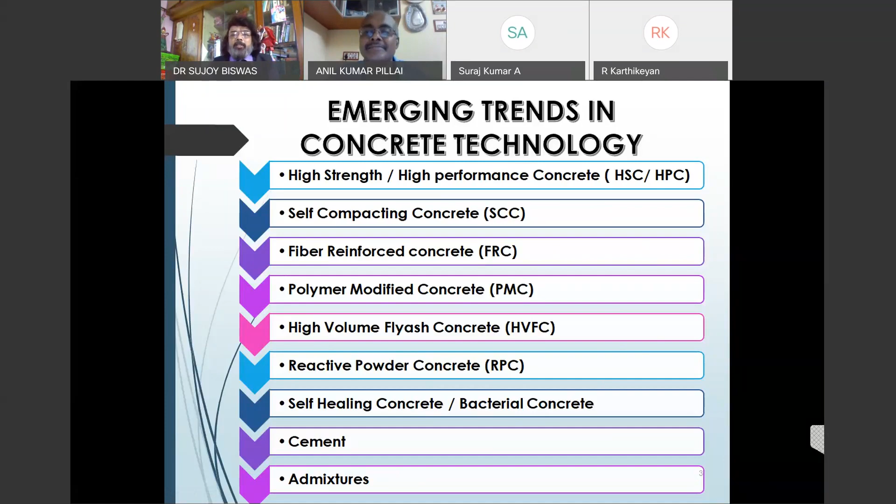Then I go to the next slide, which is the high strength and high performance concrete. The high strength concrete is primarily used in critical components. For structures exposed to aggressive environmental conditions, high performance concrete ensures long-term durability in terms of resistance to weathering action, chemical attack, abrasion, etc. High fluidity without segregation, low coefficient of permeability, and high dimensional stability are some of the characteristics of high strength or high performance concrete.

I've also given a snap of a cutting section of a real size RC column using 150 MPa concrete. Steel fiber was added in this 150 MPa concrete to prevent early spalling of the concrete cover. I wanted people to exactly understand the slide, so at the end of the slides I have given a technical glossary of the terms I've used - what is low coefficient of permeability and stuff like that. That will come as we go to the end of the slide presentation, and I'll end by describing that stuff.

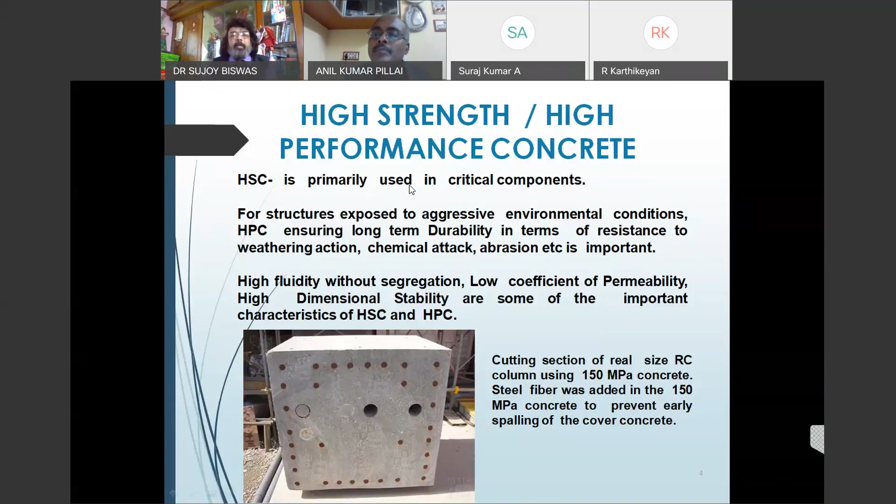Then we go to the next variety of concrete - this was the first. The second one is self-compacting concrete. The use of self-compacting concrete is basically in the precast industry, and it is gaining increasing attention due to many benefits that can be gained from its properties.

We need to remember that the concrete is capable of self-compacting, occupying all the space in the form without any external means, like mechanical vibration. So it's self-compacting concrete - it means we haven't got to put the vibrator on. This vibrator is very important because vibration actually helps the concrete. We have seen during roof casting and any kind of work that vibration is needed.

Now, what goes wrong - I had the experience on site while the G-blast furnace concreting was going on in TISCO in Jamshedpur. You know, the G-blast furnace has a huge depth, and because of that depth, this concreting cannot be done at once. It has to be done layer upon layer, layer upon layer. So what we needed to do first was use mechanical vibrators - yes, I'd not be speaking the truth if I said it wasn't there, so it was there.

At the same time, concrete chemicals were there - you know, the concrete chemicals which delay the time of concrete getting stiff. So delayers were there, and then self-compacting concrete was used, so that the vibrators don't make a difference between the first and the second layer.

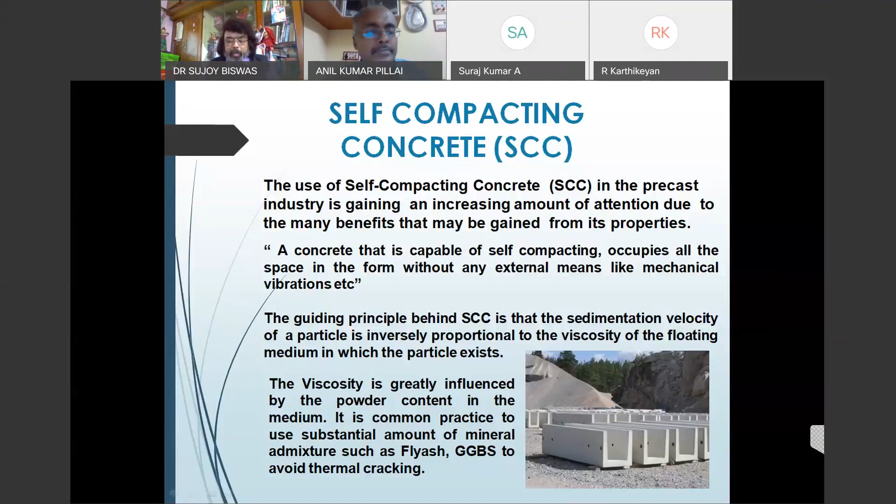So this next slide is about fiber reinforced concrete. Fiber reinforced concrete has the flexural deformation ability of a ductile cementitious composite.

So what is fiber reinforced concrete? Fiber reinforced concrete is a type of concrete that includes fibrous substances that increase structural strength, durability, and ductility. These are the three things fiber reinforced concrete provides: increased structural strength as the main benefit, durability, and ductility.

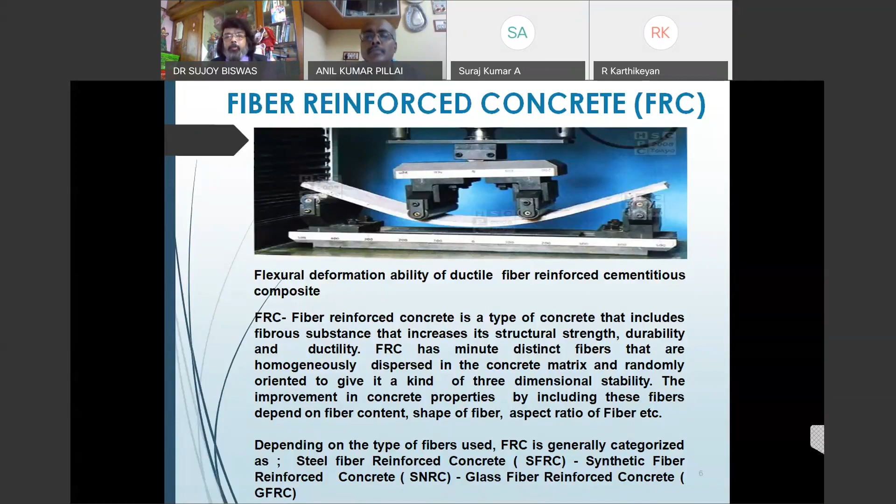So we move to the next one, polymer modified concrete. On the left, I've given a picture of an unmodified patch, which is easily dislodged due to lack of hydration. On the right, a modified patch at 10% polymer by weight to cement would not budge.

In certain cases, we use concrete formulations using organic polymers or resins to tackle the limitations offered by ordinary concrete. This polymer concrete involves mixing in polymers or resins, and it tackles the limitations posed by ordinary concrete, which can be overcome by the addition of polymer.

Polymer concrete is a composite in which 10 to 15% by weight of cement binder is replaced by polymer. If we can remember one thing after this presentation, it's that in polymer concrete, the by-weight composition of the polymer is 10 to 15%, and the binder is replaced by a synthetic organic binder or polymer latex. That is polymer modified concrete.

The takeaway from this slide should be that hydration is very important - as shown in the first portion, regarding what can happen due to lack of hydration. We keep saying cure concrete, cure concrete, cure concrete, just as we need to cure the human body. As water is very good for the human body, it is also good for concrete - curing is very important. For polymer concrete, the takeaway is that 10 to 15% by weight of cement binder should be present.

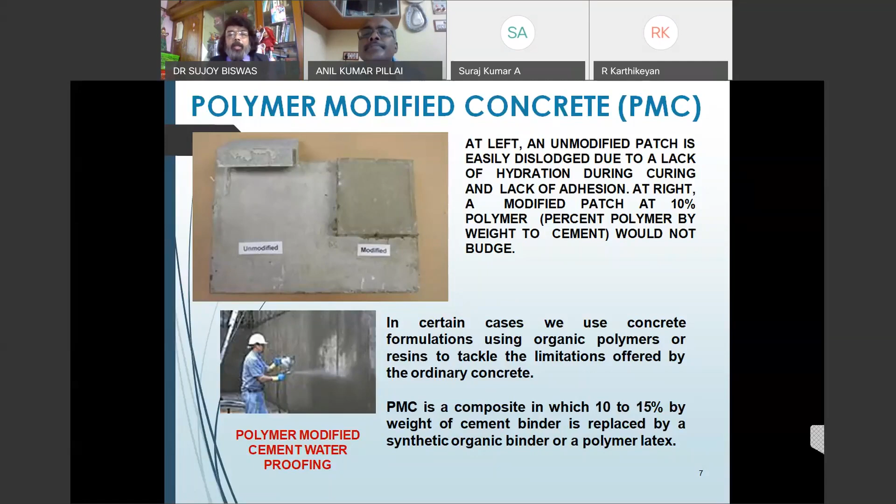The next topic is high volume fly ash concrete, or HVFA. This has huge utility - fly ash concrete is used in severe exposure applications such as decks and piers of bridges. Most bridges and piers running for kilometers use this high volume fly ash concrete. I've given a picture of Tampa Bay's Sunshine Skyway Bridge, which is very scenic to look at.

When we think of civil engineers, we only think of the computer engineers who design software packages in those countries. It needs to be remembered, if civil engineers do not lay the foundation or the infrastructure, nothing is going to stand. If cement people don't produce cement, tomorrow we are going to be nowhere, whether the economy is strong or weak.

So I keep on saying, continue with high volume fly ash concrete, which has very low water content. At least 50% of the Portland cement mass is replaced by class C or class F fly ash. High volume fly ash concrete has 50% fly ash. Sometimes, due to low water cement ratio, use of super plasticizers are required to improve workability while placing the concrete.

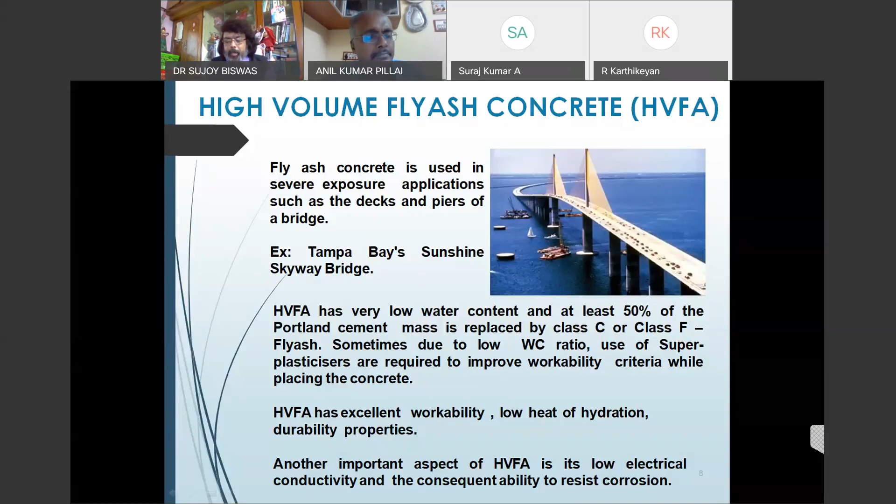Then if we go to the next slide, we'll show the reactive powder concrete, or RPC. The reactive powder concrete is an ultra high strength and high ductility composite material. It is a special concrete with its microstructure optimized by precise gradation of all particles in the mix to yield maximum density. I've given the picture which shows reactive powder concrete.

We find from the picture, on the left hand is the reactive powder concrete, and the right hand is the steel beams. We find it's very difficult to distinguish, even for a civil engineer, by seeing a black and white picture, what is steel and what is concrete.

The cement in the concrete portion is strong in compression and weak in tension. The steel part is strong in tension and weak in compression, that's why reinforcements are done. So here the concrete itself, not only its compressive strength, but its tensile strength also increases. This is one of the takeaways from reactive powder concrete.

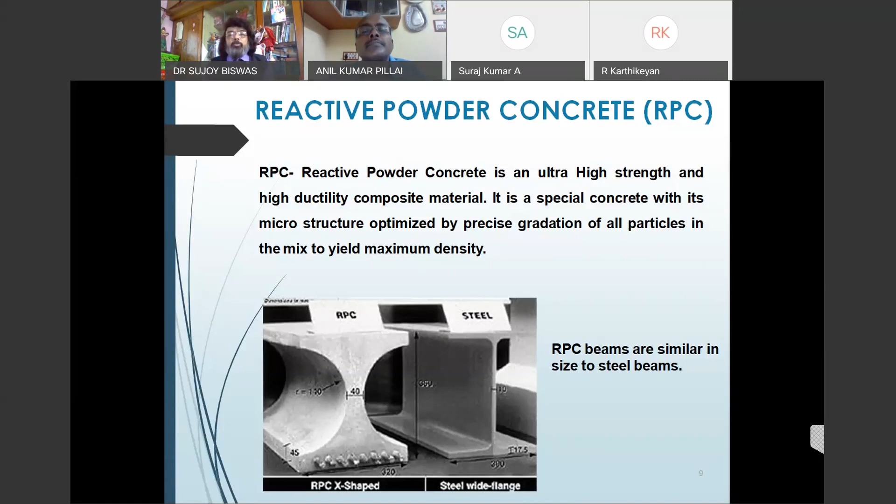Then we go to nano cement. Nano cements are being developed as cements containing well dispersed nanoparticles of cement and mineral admixtures. These nanoparticles would be evenly distributed. Again, the even distribution in any sort of concrete is very important. Evenly distributed among the larger particles of mineral admixtures, and with such fine dispersion, even the lower content of cement should be able to provide us the desired binding of aggregates and admixture particles. These are the nano cement qualities we need to discuss.

First of all, there should be even distribution, among the larger particle mineral admixtures. There should be concrete admixtures used, and the cement should be able to provide the desired binding of aggregates and admixture. This has to be very neatly monitored by the engineers working on site, who must be very serious, because we know what can happen if certain small things go wrong in a civil engineering project.

Now on cement, I have talked of nano cement, and now I'm talking of engineered cement. Engineered cement can be equated to engineering the performance of cement by tailoring the chemical composition and controlling the particle size distribution. So when we talk of concrete design mix, I talked of paste and aggregates and stuff like that. Let me complete this.

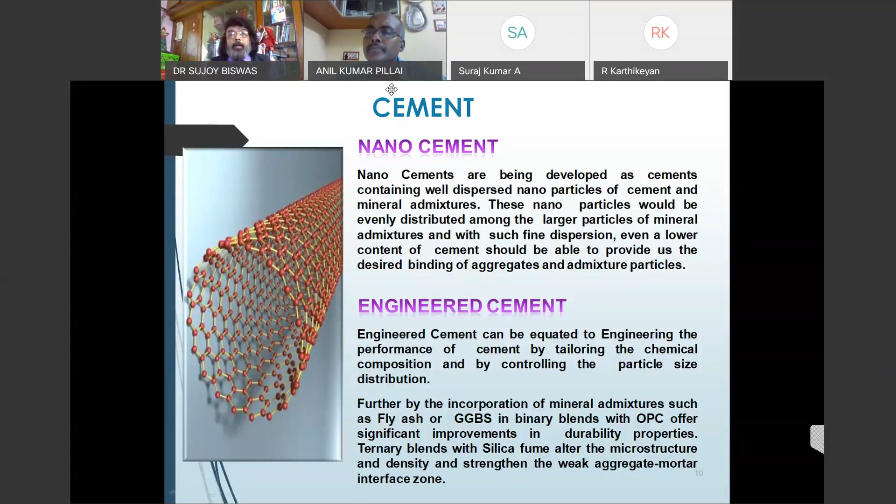Concrete is important, but we need to understand it is not only important, it's also very costly. So mixing, curing, and surface finishing should be done carefully, because if there are ruptures or concrete comes out from the formwork, we need a lot of cement paste or cement with aggregates for plastering to make the outer surface smooth. We should be careful with concreting among the nine grades of concrete. Design engineers must decide which of these nine types to use, what will be economic, considering transport and logistic issues, and especially post-corona, cost effectiveness should be taken into account. We should focus on bringing down the cost of construction.

As designers, I could have presented slides with a lot of SPSS or statistical tools showing what happens in the labs. But what is important in labs is the basic stuff we work on. What is more important is how we can implement it on site. Indians are very strong in planning but very weak in implementation, because we have mathematical brains and keep talking mathematics, but when it comes to ground reality, it becomes very tough.

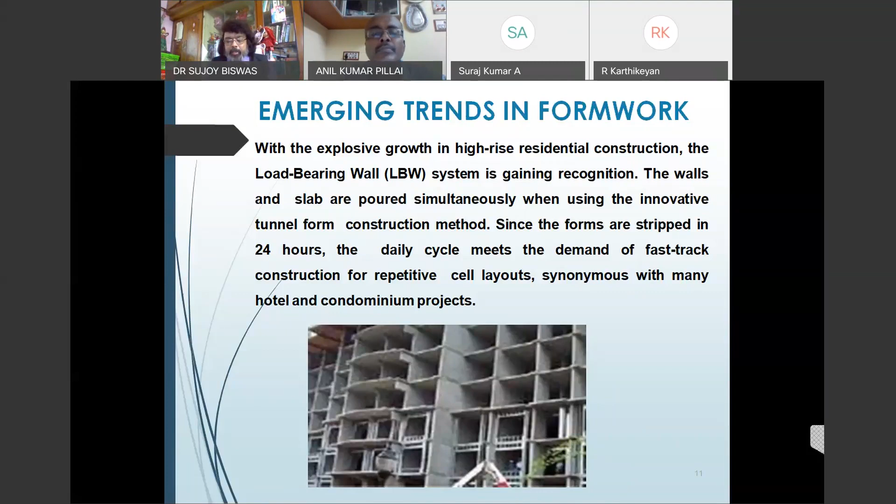Next we talk of the new form materials. What are they? These are extruded aluminum forms, plastic forms, fiber forms, fabric forms, form liners, Com Shells, inflated forms, and combinations of the above. My takeaway would be that there are currently 7 kinds of new form materials - just as we've seen 9 types of concrete, there are 7 types of new form material. If people can remember how many kinds - 7 kinds - and what they are, I'll repeat: extruded aluminum forms, plastic forms, fiber forms, fabric forms, form liners, Com Shells, inflated forms, and combination of the above.

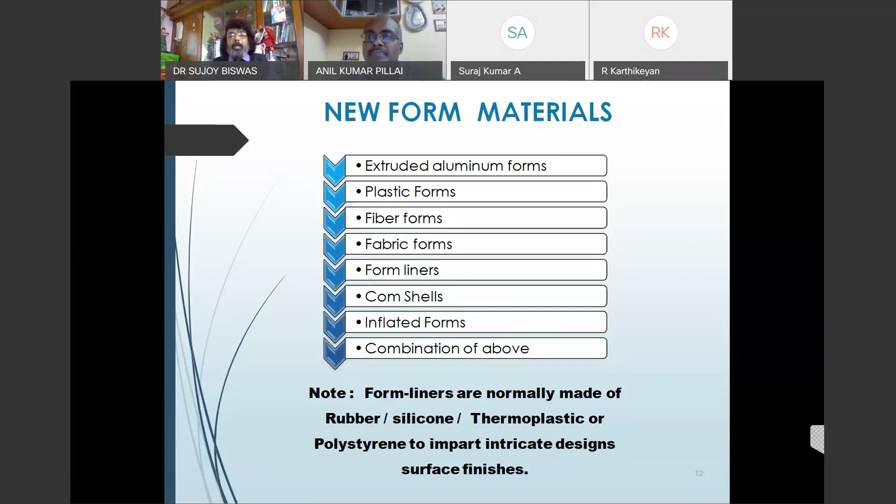I'll go one by one. I have written that form liners are normally made of rubber and silicone, or thermoplastic, or polystyrene, to impart intricate designs and surface finishes. Why surface finishes and designs? Because we don't have to do the plastering and designing separately. So again, on the economy - things are coming out of the labs each year and each month, so we can go ahead with that. I'll show an example in the next slide - you won't be able to tell whether an artist has done it or it's from the new form types. Can I go to the next slide?

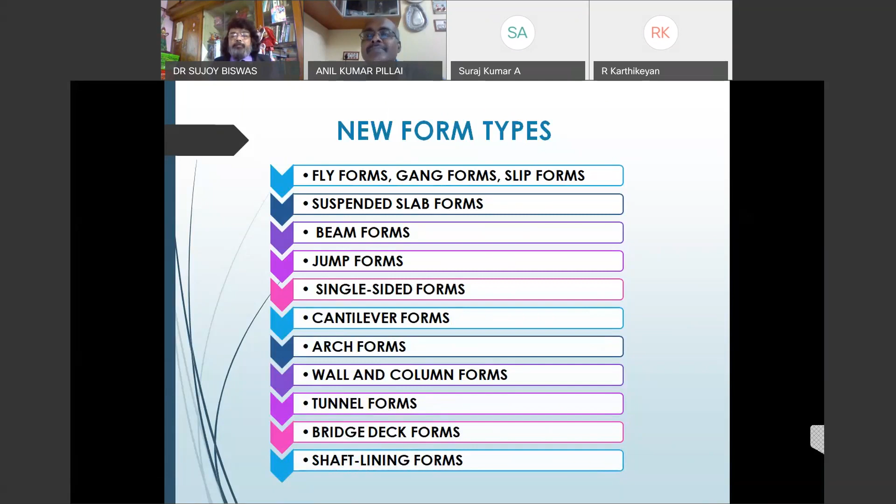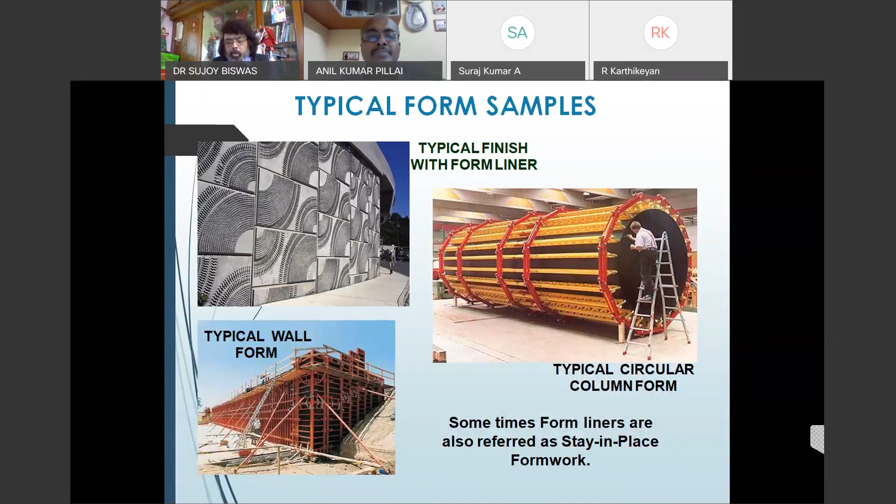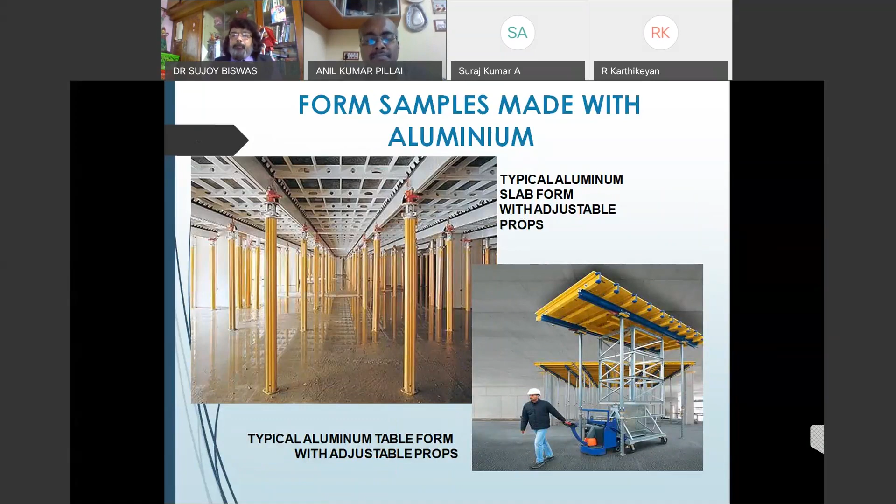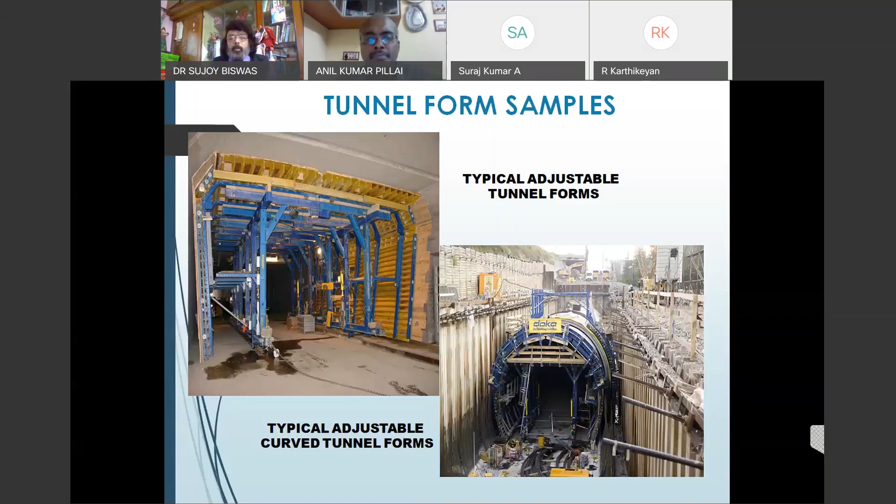This kind of new formwork not only makes the concrete surface smooth with good types of concrete mixing and ductility, but also reduces the cost.

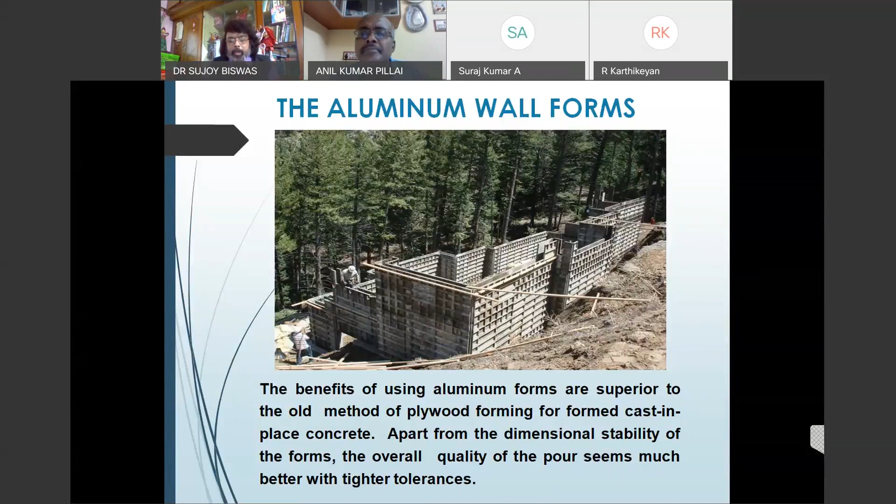Now we come to another variety, the insulating concrete forms. Homes built using insulating concrete forms, or the ICF system, literally have the insulation built into the walls as part of the structure. The system creates walls with high thermal resistance, with R values ranging above 17. I've also explained this further in the slides that follow, where we discuss the R value in detail.

What are R values? We know R value, or resistance, is defined as the ratio of temperature difference—it's a measure of the resistance to heat flow. There are codes that determine, for a given thickness, what the R value will be and what the cost will be.

Even though ICF homes are constructed using concrete, they look just like traditional stick-built homes. Can we find any difference? There's no difference. So these are the insulating concrete forms.

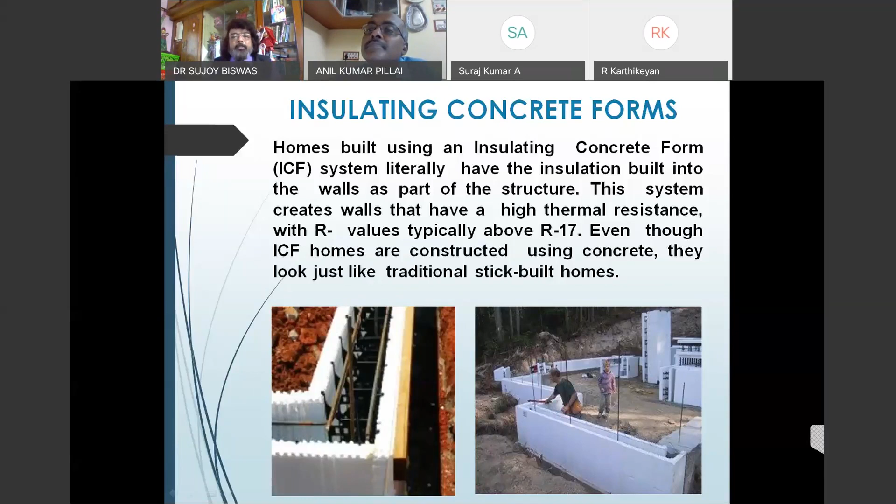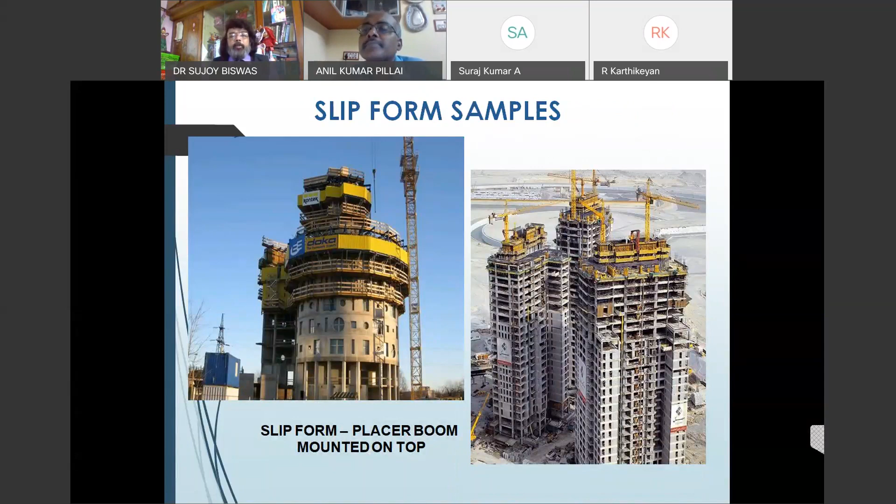And there are also Comshells. The examples I've given are examples of Comshell forms—Comshell, typical fabric form, and typical inflated forms in the next slide. So these are the kinds of formwork that are used these days.

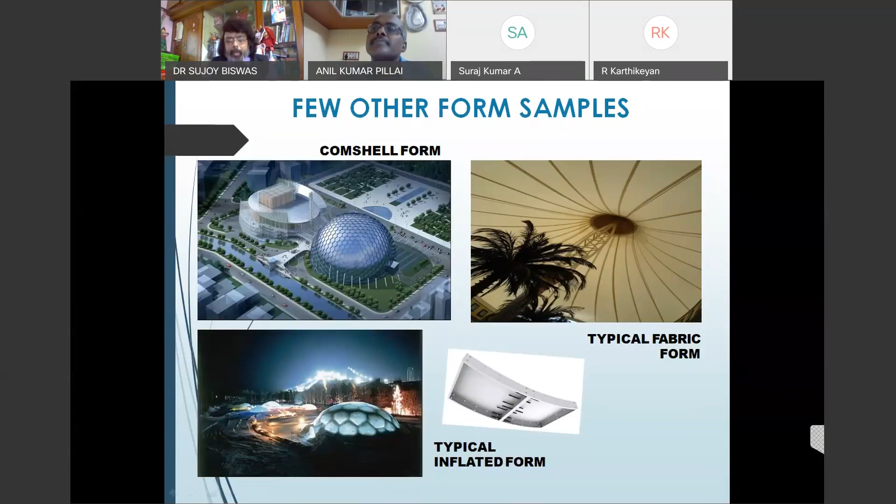I conclude the presentation, then I'll go to the technical glossary. I conclude by saying that future civil engineers cannot bind themselves just to the knowledge they've accumulated within the four walls. The lab is good, the wet lab is good in order to learn, but what they need to know is to keep learning emerging technology and apply it in the field.

If anybody is willing to work on research and development, that research and development should be functional. It cannot be only for a PhD thesis. Trust me, my chairman, the Techno India chairman, keeps saying that 99% of the theses we all make for our PhD degrees will become waste papers at a later point of time.

So we should, if we do something functional and add value to the functional system, only then will we be able to move forward. I conclude by saying that this presentation is a humble effort to make young engineers stand face to face with the marvels of the emerging trends in concrete technology and building framework. That was my last statement.

If I have time, I can go through the technical glossary, or just run through it if time permits. Should I go through it? Yes please, yes please sir. You can. So I'll go to the technical glossary and continue. Can I go to the next slide? Where is my technical glossary?

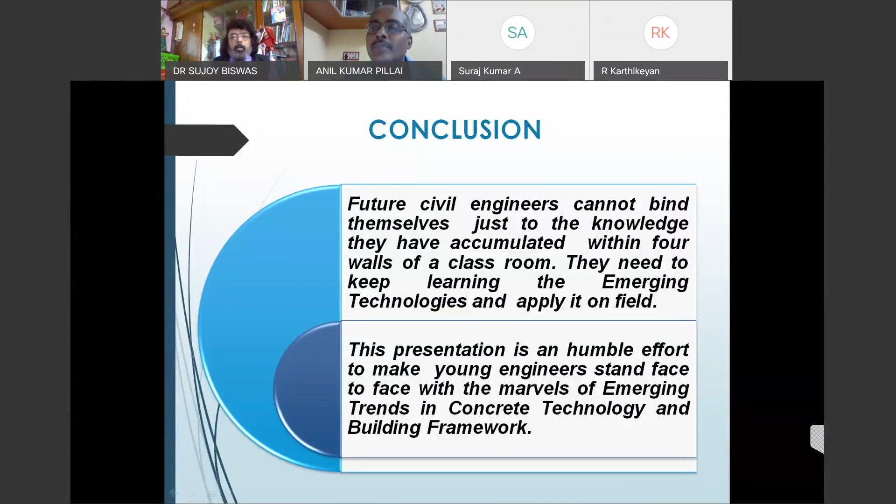So this is a glossary of technical terms. The durability of concrete depends upon: one, the degree of exposure; two, the concrete grade; and the cement content. A high density, alkali resistant concrete will better resist the effects of moisture penetration. Since concrete is a porous material, reinforcement bars within the concrete will be subject to possible corrosion if safeguards are not taken. Adequate concrete cover to the reinforcement must be included in the specification in order to reduce moisture or salt penetration into the rebar.

We need to understand that in reinforced cement concrete, if the reinforcement is compromised in any way, the whole reinforced concrete system fails. The concrete itself cannot prevent failure, because it results in structural failure of both the steel and concrete together. Should the rebar corrode, it will expand, and the considerable forces involved will cause the concrete cover to crack.

Now, what is the coefficient of permeability? The coefficient of permeability of a soil is how easily a liquid will move through that soil. It is commonly referred to as the hydraulic conductivity of a soil.

I'm not going through every statement, I'll just cover the main ones. The spalling of the cover concrete: the word spalling in engineering describes the chips or fragments of material broken off a bigger object. The process of spalling, also known as spallation, is the surface failure that occurs when a material such as concrete, brick, or limestone is subjected to excess moisture and similar conditions.

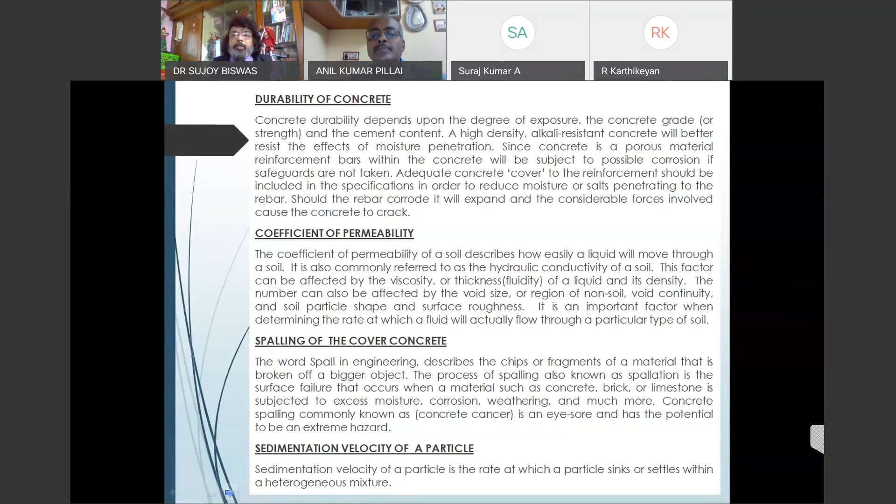So what is the viscosity of the floating medium? Viscosity is measured in terms of resistance to deformation at a given rate. For liquids, it corresponds to the informal concept of thickness. For example, syrup has a higher viscosity than water. In more scientific terms, the viscosity of a fluid refers to how easily it moves under stress.

As I have explained, GGBS is ground granulated blast furnace slag, a cementitious material whose main use is in concrete. It is a byproduct from the blast furnace used to make iron, and that byproduct is recycled. That is very important, and it goes into making the concrete strong.

The blast furnace operates at a temperature of about 1500 degrees centigrade and is fed with a carefully controlled mixture of iron ore, coke, and limestone. The takeaway from the slide: if someone can remember that GGBS is ground granulated blast furnace slag, then I'm done.

The durability of a cement is defined as the ability to resist weathering action, chemical attack, abrasion, or any other process of deterioration. Durable concrete will retain its original form, quality, and serviceability when exposed to the environment. I gave these terms so that my previous presentation gets more clarity.

Ductility can be defined as the ability of a material to undergo large deformation without rupture before failure. Ductility is increased by an increase in compression steel content and an increase in the concrete compressive strength. As I said, concrete is strong in compression and weak in tension, and the reverse is true for the reinforcement.

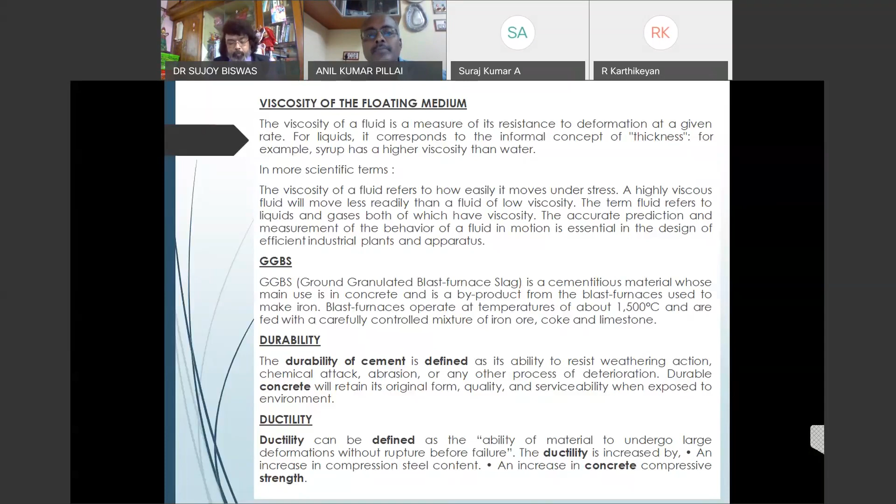As I already defined, the aspect ratio of the fiber is the ratio of its length to its diameter. Typical aspect ratio now ranges from 30 to 150. If one can remember that typical aspect ratio range, my job is done. Fiber reinforced concrete, or FRC, is a concrete containing fibrous material which increases structural integrity.

It contains short discrete fibers that are uniformly distributed and randomly oriented. Now, what is the water cement ratio? It is the ratio of water to cement. For example, a water cement ratio of 0.4 means 40 grams of water to 100 grams of cement.

The normal water cement ratio is 0.6 to 0.7, and there is an Indian standard code which defines how the water cement ratio should be determined. All Indian codes keep defining these things one after another, and we find that in the Indian code IS 10262:2009, we have the definition of this water cement ratio.

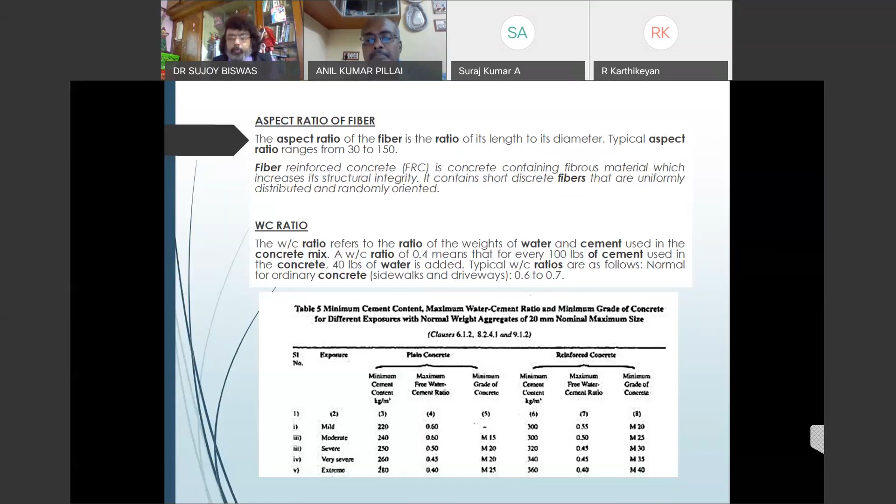Now going to the next slide, the ternary blends. As I said, ternary is like tertiary, the third level, the third mixture is the ternary one. So ternary mixtures are concrete mixtures that include three different cementitious materials.

The report addresses this combination of Portland cement, slag cement, and a third cementitious material. The third component is often fly ash, but silica fume is not uncommon. ASTM C595 blended cement used in combination with a third cementitious material, also considered, is a ternary mixture.

So this is ternary. So what is silica fume? It's a typical byproduct of producing silicon metal or ferrosilicon alloys. One of the most beneficial uses of silica fume is in concrete, because due to its chemical and physical properties, it is a very reactive pozzolan.

Pozzolan refers to the materials or aggregates which we use in concrete. Concrete containing silica fume can have very high strength and can be very durable. Silica fume is available from suppliers of concrete admixtures, and when specified, is simply added during concrete production.

What are repetitive cell layouts? In building construction, some layouts are needed to be repetitive in nature, such as the rooms of hotels, classrooms, or schools. Such building layouts are called repetitive cell layouts. Some methods allow fast-track construction for such layouts.

What are extruded aluminum forms? Building aluminum extrusion materials mainly refers to aluminum profiles used for building doors and windows, building curtains, indoor and outdoor decoration, and building structure. Then we go to the next slide.

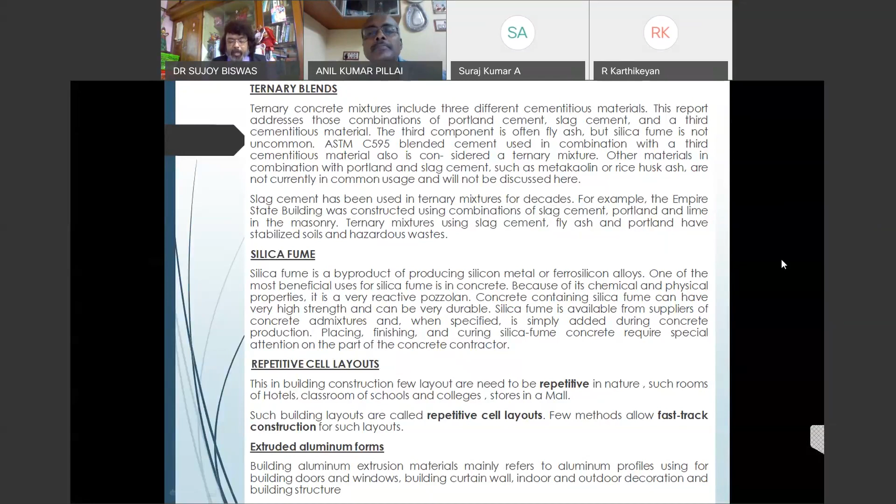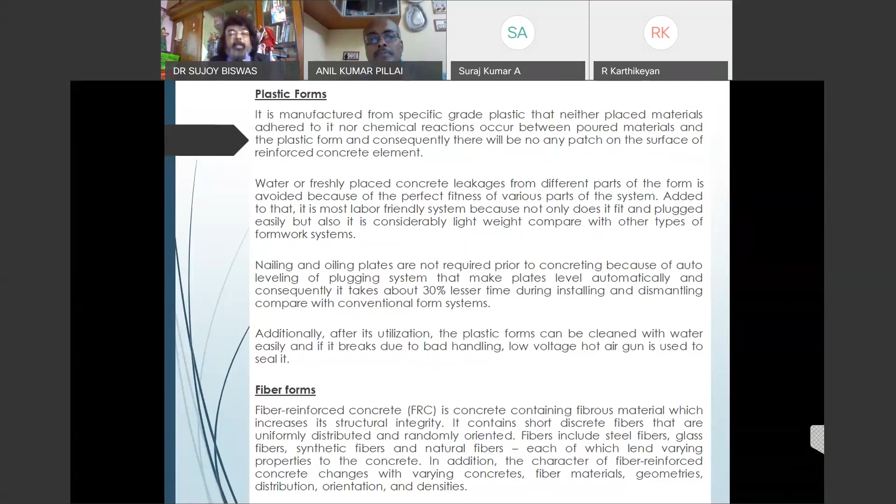What are fiber forms? These are the plastic forms. Fiber reinforced concrete is concrete containing fibrous material which increases structural integrity, as we dealt with in detail during the forms. It needs to be remembered that the character of fiber reinforced concrete changes with varying concretes, fiber materials, geometries, distribution, orientation, and densities, so these must be taken into account when designing the mix.

Now we go to form liners. Form liners are the liners used in the preparation of designs on concrete walls. Use of form liners often results in more attractive walls for highways, neighborhoods, beaches, and parks, as the outside design becomes easy.

The composite forms, or steel concrete composite shell forms, are formed by pouring concrete on a thin sheeted steel base, which serves as both the permanent formwork and the tensile steel reinforcement. The thin shell base is constructed by bolting together open-top modular units consisting of a base plate with surrounding edge plates, forming a steel shell with stiffeners in both directions. The new system retains all the benefits of thin shell concrete but eliminates the need for traditional forming.

Now to the typical fabric form. Fabric form is a building technology that involves the use of structural membranes as the main facing material for concrete molds. Unlike traditional formwork, the material is highly flexible and can deflect under pressure of fresh concrete.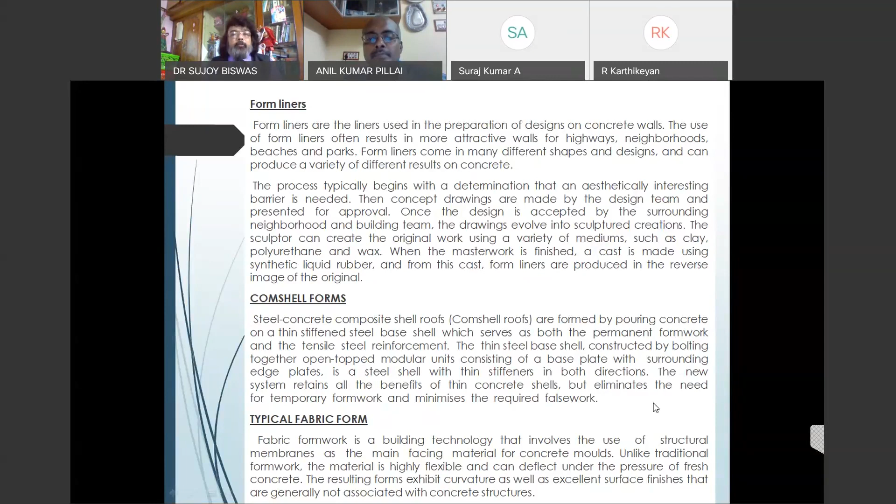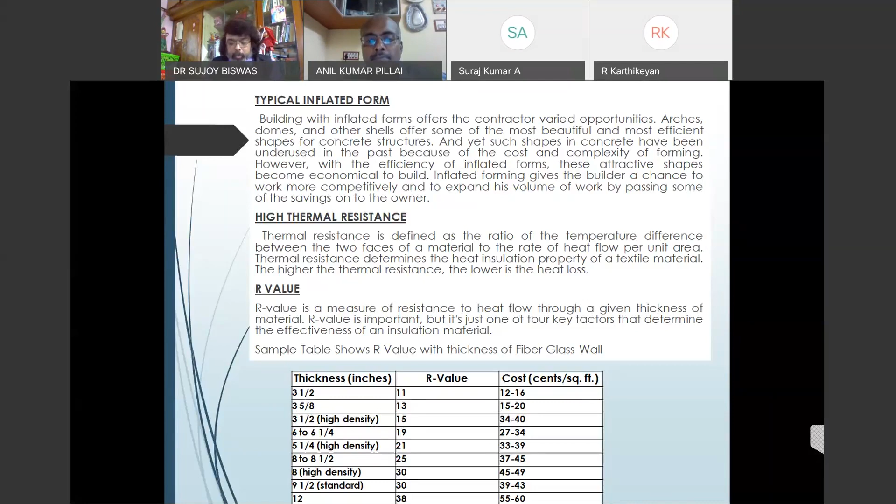Then naturally comes the R value, a measure of the resistance to heat flow through a given thickness of material. R value is important, but it's just one of four key factors that determine the effective insulating performance of a material. The sample table shows R value with thickness of the fiberglass wall, given for R values from 11 up to 38.

Now, about slip form: continuous poured, continuously formed, or slip form construction is a method in which concrete is poured in a continuously moving form. Slip form is used for tall structures such as bridges, towers, buildings, and dams, as well as horizontal structures. For example, forming a 118 meter tall grain silo in Zurich in 2015, a continuous slip form gravity-based structure supporting the construction of a Norwegian fjord platform, with jib cranes delivering buckets of concrete to the support cylinders.

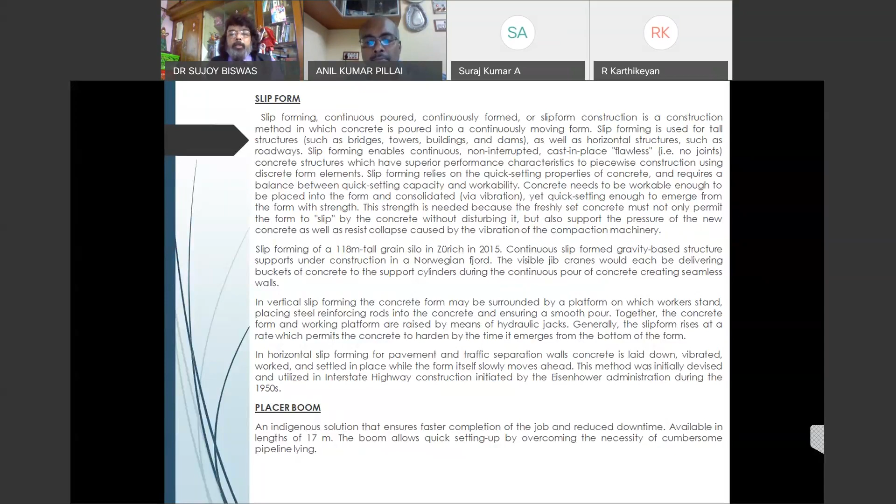Now, the placer boom is an indigenous solution that ensures faster completion of the job and reduced downtime. Available in lengths of 17 meters, the boom allows quick setting up by overcoming the necessity of cumbersome pipeline laying.

Then the Comshell forms: as mentioned, these steel concrete Comshell forms are formed by pouring concrete onto a thin, stiffened steel base shell, which serves as both the permanent formwork and the tensile steel reinforcement.

Then we come again to the typical fabric form, a building technology that involves the use of structural membranes as the main facing material for concrete. Unlike traditional formwork, the material is highly flexible and can deflect under pressure of fresh concrete, and the resulting forms exhibit curvature as well as excellent surface finishes not generally associated with concrete structures.

And then the typical inflated form: building with inflated forms offers the contractor varied opportunities. Arches, domes, and other shells offer some of the most beautiful, most efficient shapes for concrete structures, and yet such shapes in concrete have been underused in the past because of the cost and complexity of the forming.

However, with the efficiency of inflated forms, these attractive shapes become economical to build. Inflated forming gives the builder a chance to work more competitively and to expand his volume of work by passing some of the savings on to the owner.

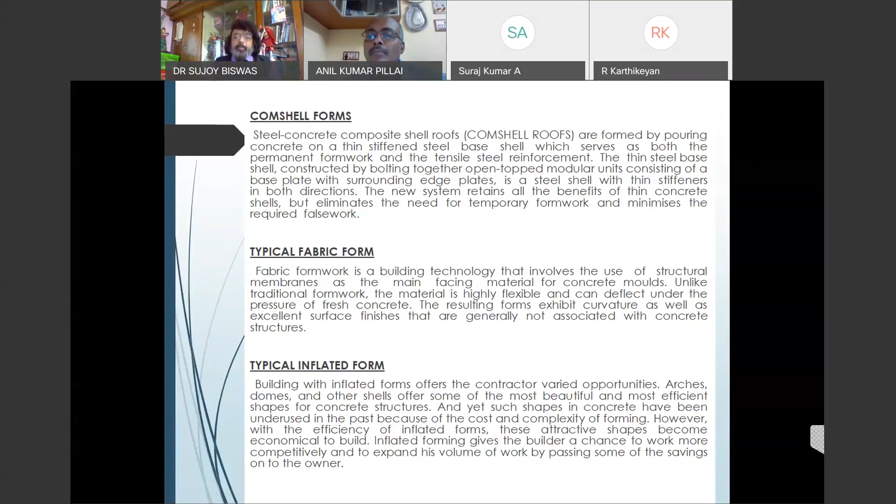So this brings me to the end of my slides, and I thank you for patiently listening to such a huge topic. But I keep saying that koshish karne walon ki kabhi haar nahi hoti - we have to keep trying. I keep on saying one thing, that in this time of challenge, I motivate myself also saying that good thoughts lead to good actions. Good thoughts lead to good actions, good actions lead to good habits, good habits lead to good character, and good character leads to good destiny.

So this thought process of conducting the webinar, and the action that we have taken - good thoughts lead to good action, good actions will lead to good habits, we'll have continuous webinars like that. Good habits will lead to good character, we'll keep on learning every time, and good character will lead to good destiny, because after the lockdown period is over, we'll have a destiny for something more.

All my effort was to add a delta of knowledge to what people already know - not just knowledge, but retentive knowledge, the knowledge that can be retained. And I keep on saying that failure is a challenge, accept it.

असफलता एक चुनौती है, इसे स्वीकार करो। क्या कमी रह गई, उसे ढूंढो और सुधार करो। जब तक ना हो सफल नींद चैन को त्यागो तुम, संघर्ष का मैदान छोड़कर मत भागो तुम। कुछ किए बिना ही जय जयकार नहीं होती, कोशिश करने वालों की कभी हार नहीं होती।